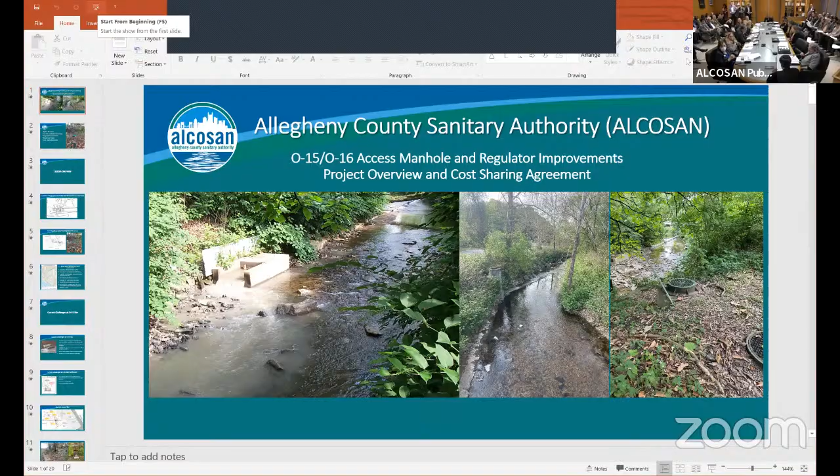Item E is motion to adopt resolution number 2024-2-1, authorizing executive director to execute the reimbursement agreement with PNC Bank for the issuance of letters of credit to Duquesne Bank, which is required. Yes. I believe this is on my. Yes, the director of regional conveyance, Mike Mitchell, will provide a presentation of this. An exciting project. It is a great opportunity for the authority to partner with customer municipalities. And Mike is going to walk you through the complexities of what the project provides for.

Thank you, Arla, Madam Chair. This is one of those projects that's kind of been in the pipeline for a little while. Probably, we started this back in 2017, looking at this really hard, seeing what we could do with improving the access and improving the flow characteristics at this site. I'm going to give you an overview of the 015-016 access manhole and regulator improvements projects, a project overview, and touch on the cost sharing agreement that's been developed as part of this project.

These photos, as you can see, are from the specific areas. I'll have more photos to share. I'm going to touch on a few points, just some overview. Current challenges at the 015 site. There's quite a few challenges with this site. Our proposed improvements. We're currently at 90% design. We're moving to final design. We've got some property acquisition to take care of, as well as some additional items before we bid this project. I'm going to go over ultimate benefits of this project and discuss the cost sharing agreement briefly.

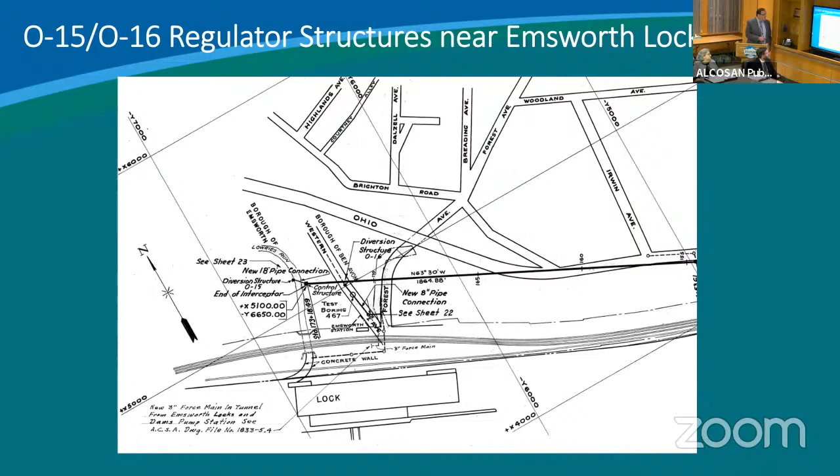This is kind of a view of the 015 overflow relief and the 015 regulator structure. In the picture on the right, you can see the regulator structure, and across the stream, you can see the 015 overflow relief structure. And then also in the far back, you can see our access, which needs to be improved.

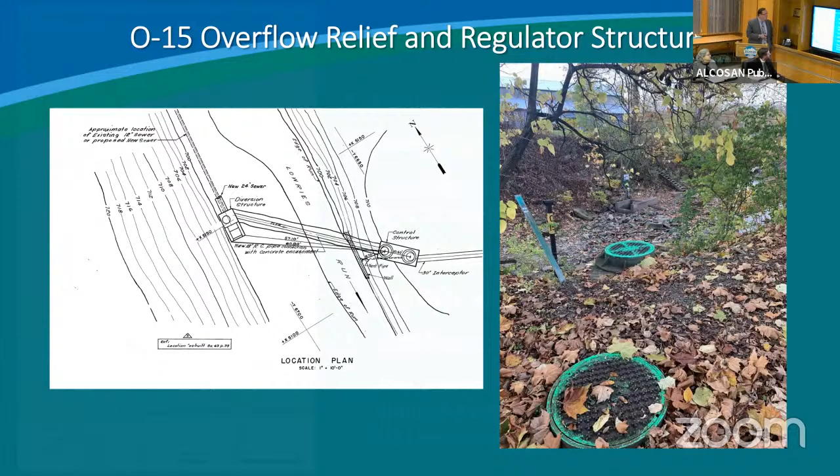Just some brief statistics on the Lowries Run shed. This is the Camp Horne Road area. If anybody's been down there, it's a pretty big watershed, approximately 22,000 people, 10,600 acres. We have, again, our regulator structure on the west bank, 016 regulator in Western Avenue, and then our lower Ohio interceptor, which is pretty much a straight shot to the treatment plant. We also have 30,000 feet of municipal trunk sewer, jointly operated by McCandless Township Sanitary Authority and Ross Township.

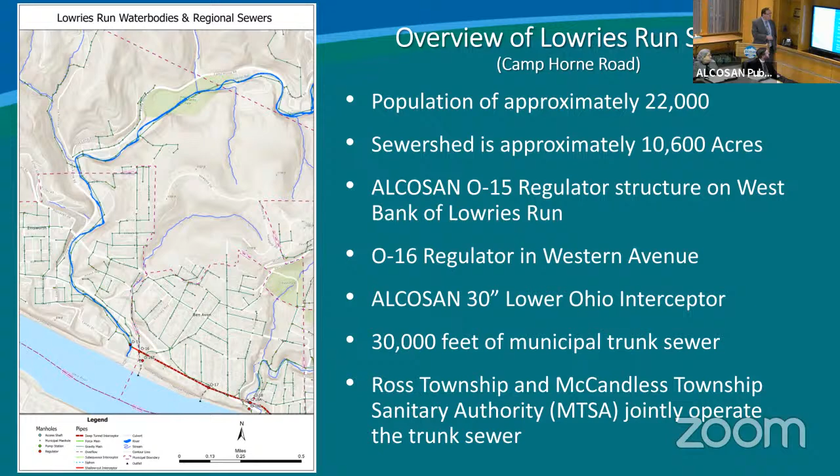Current challenges at the 015 site. 015 is the largest sanitary sewer overflow in the service area. It discharges over 185 million gallons annually. The regulator across the stream has hydraulic restrictions. The connector pipe going from the overflow structure to the regulator across the stream is only 18-inch. There's a number of pipes going into this overflow relief, including a 24, a 12, and a 12. So it's really constrained at the river crossing. It's constrained by the regulator structure on the opposite side of the stream.

The relief structure here gets stream bed sediment in it, and it collects sediment and debris. So that's, again, an operation and maintenance issue. We also have a number of encased sewers. I got some photos of that, where they're crossing the stream. This is more of a regulatory issue; basically, they act as inhibitors to fish access and aquatic life. So we want to try to remove those while we're doing any work. Routine access and maintenance is challenging.

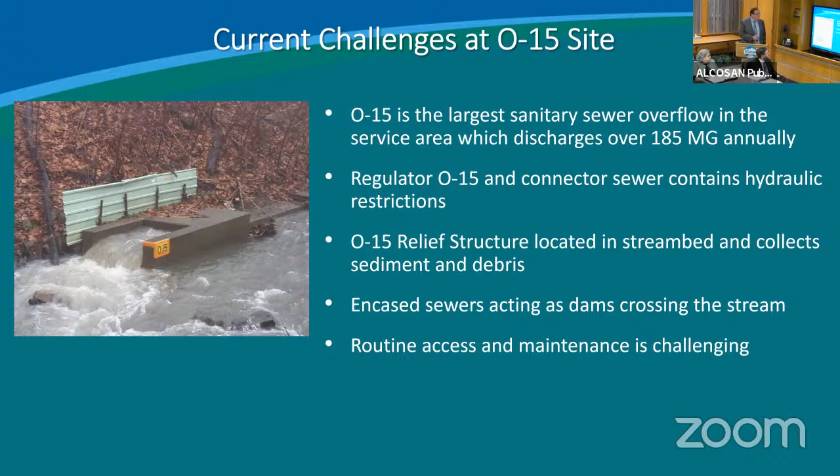Okay. Another issue that we encountered in 2019, we sonared the pipe from 015 to 016, and we found debris. About 50% of a debris pile between 015. There's CD requirements for cleaning. Unfortunately, we don't have any access. So that's another problem. So multiple problems at this site, multiple issues that need to be addressed.

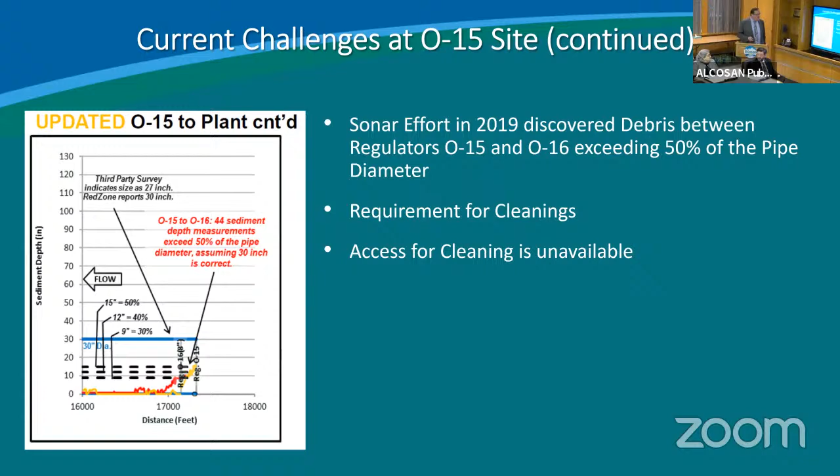This is basically a map showing you some of the maintenance issues. We have this river crossing that's undersized, 18 inches shown. At the reg location, the access is poor. The maintenance is difficult. It's below the stream bottom, so it collects debris. We have sediment blockage over near the 016 regulator, and we had excessive debris accumulation at the 015 relief structure.

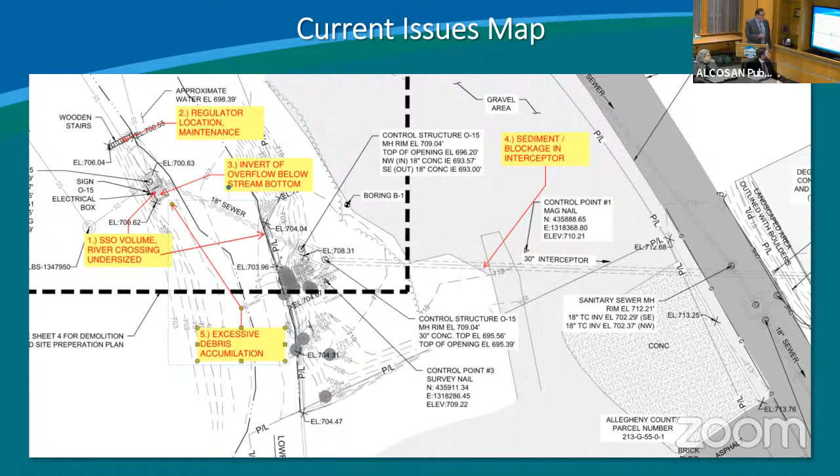Okay, proposed improvements. We work in conjunction with Hatch, who is our final designer, to facilitate some improvements. One of the concepts they came up with, well, this is originally an ALCOSAN concept. They just perfected it. All right, we relocate the 015 regulator from here over to the other side of the stream. It's flat, easily accessible. We raised the overflow weir 2 feet. This really had an impact on overflow reduction.

We're going to be constructing a new 30-inch line to connect to our 30-inch lower Ohio interceptor. We're going to put a new manhole structure on this side. This is going to be converted to a manhole, and then we're also going to put an access manhole on the 016 side of the regulator to facilitate cleaning of that debris pile.

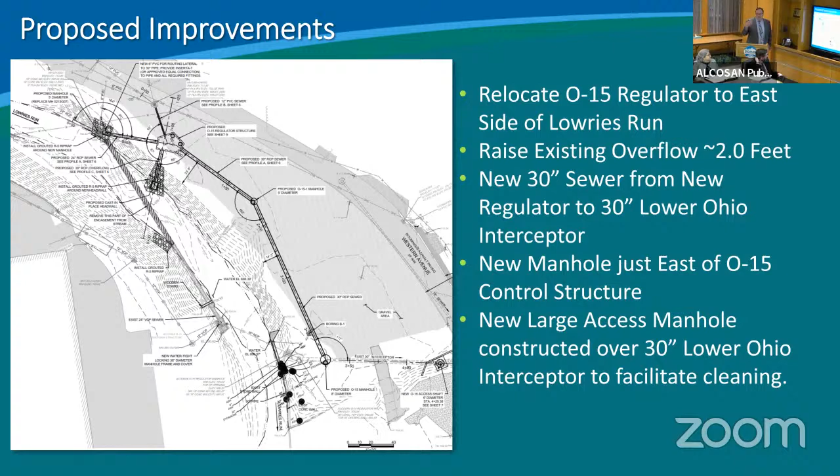Okay, as I mentioned here, you've got a number of stream crossings that are acting to inhibit the movement of aquatic life. We're going to remove those. We're going to convert the existing overflow relief to a watertight manhole. We're going to basically take a lot of the internals out of this structure and improve the flow characteristics. So there's no longer any hydraulic restrictions in the O-15 chamber.

And then we're going to lower and replace this manhole up here. Part of it is to eliminate the need for a joint permit. But also, it's sticking way up in the stream there, and it's just not a good characteristic from a flow standpoint.

Okay, benefits of the project.

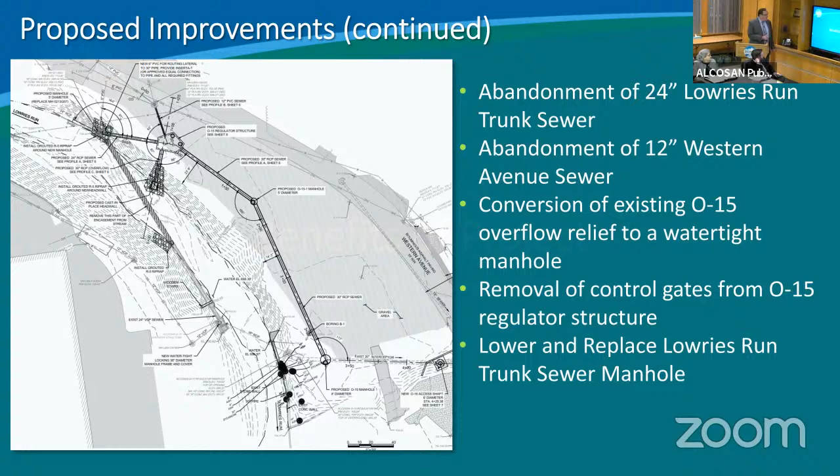Big benefit, SSO volume. It will be reduced from 185 million gallons to 127 million gallons under current condition. When the plant comes up to 480, we're gonna cut that down even further to 1.8 million gallons, which is over a 99% reduction in the sanitary sewer overflow.

As stated, we're gonna be removing all the existing hydraulic restrictions and maximizing the flow to the treatment plant, which is part of the CSO policy, but not necessarily. It applies all over the system. You want to try to maximize flow and limit overflows, basically.

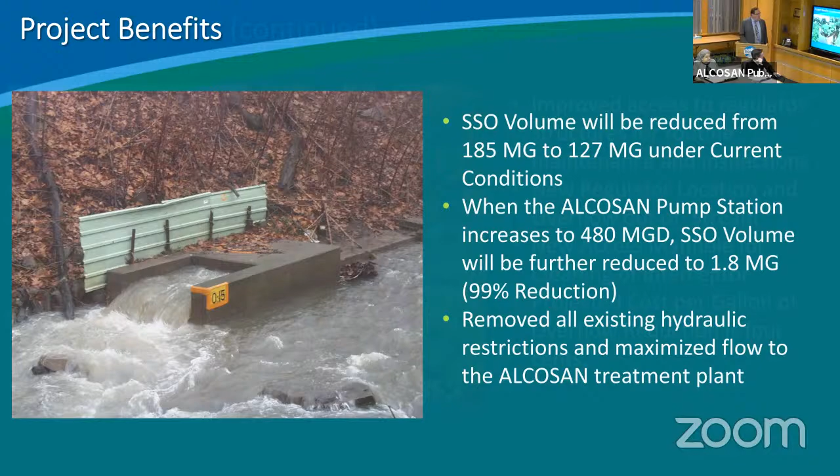Okay, additional improvements, additional benefits: improved access to the regulator structure for routine maintenance and inspection. You can see how this manhole is sticking up here in the side. We're gonna lower that and make that a better system there. New relocated overflow system will be up on the bank, in an area where the crews can access it and maintain it. There's gonna be a new access manhole for cleaning of the interceptor.

One of the big bangs of this project, if you even exclude the plant impacts, we're at about 4 cents per gallon of overflow reduction, which makes this a highly cost-effective project. Okay. Overall cost is between $2 and $2.5 million projected.

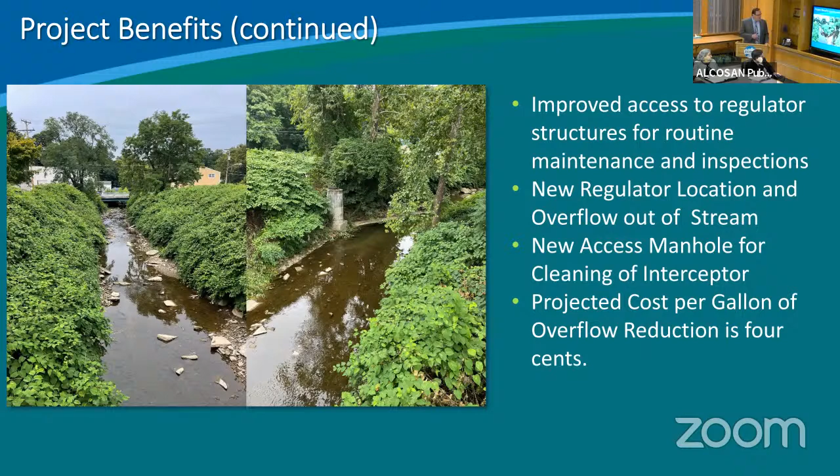Cost sharing agreement. We knew we were going to reconfigure MTSA and Ross Township sewers, so we had to meet with them. So we initiated a meeting in April 2023 to seek their approval to reconfigure their sewers. We had follow-up meetings in August and October. We presented the multiple benefits of the project.

As a result of that, they were desirous of participating in a cost share agreement with ALCOSAN for moving their facilities and removing the stream encasement, reconfiguring their manhole. So that's basically their cost share. And then working in conjunction with Max and Laura Stone, Babst Calland, and the solicitors from MTSA and Ross Township, we've developed a cost share agreement, which is on the board agenda for tonight.

So project participants: ALCOSAN, Hatch was the final designer, Babst Calland. And this was expanded as we go through the project, and we had a CM and other folks, Ross Township, MTSA. So we're pretty excited about this project. We're hopefully excited to get it kicked off very soon, and we're looking forward to it. Thank you. Any questions?